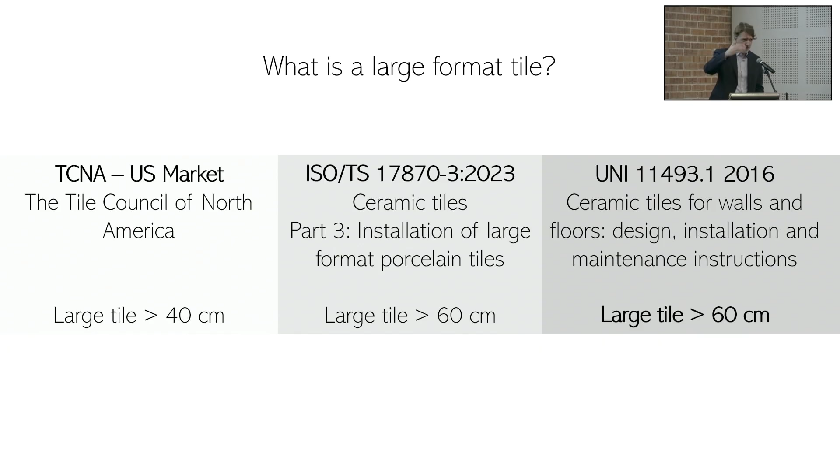You see, for example, in the United States, in Europe, in Italy, their local norms give advice to designers and, of course, to applicators on what is a large format tile. As you can see, in the United States they say more than 40 centimeters. In Italy, in Europe, basically we say higher than 60 centimeters. So this is the first step we do to analyze the situation. And of course, if you say over 60 centimeters, it can be 2 meters, 3 meters, even more in terms of dimension of the tile, because the tile producer can make large tiles in a thin, very thin thickness. This is a key point about fixing tiles and properly handling them.

The first thing I'll say is something very non-technical, a practical thing. People choose the large format tile and think about how to fix it, but sometimes they don't really consider the logistics, the practical application of this kind of material. When you receive a large format tile, you receive it on a pallet like this, so the maneuvering, the movement, the handling of a large format tile requires a specific environment. In my private little house, it would be difficult to obtain something like this. It seems a very underestimated thing, but it's true.

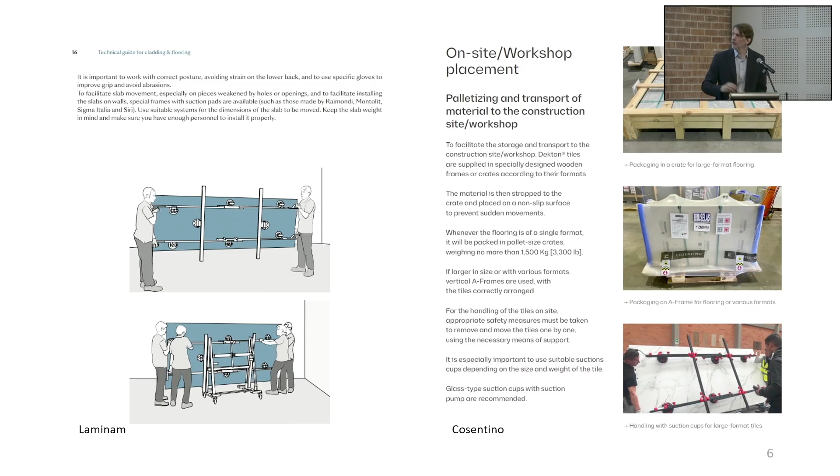All the tile producers, Laminam, Panaria, Atlas Concorde, apart from the adhesive system you have to use to fix tile, they put out recommendations on how to handle them. Do you know how much one tile costs, 3 meters by 1 meter 60? A lot. Since they are very thin, the movement of this kind of material is the first key point.

We need to use special tools, sucking pumps, bars and metal elements to move them without breaking. I see on YouTube and TikTok some video applications of this kind of material, and honestly it's not a reflection on the people doing the job, but the risk of breaking this tile, especially when they are 3, 5, 6 millimeters in such long dimensions, is very critical. So these are the right tools we can use for maneuvering the large format tile.

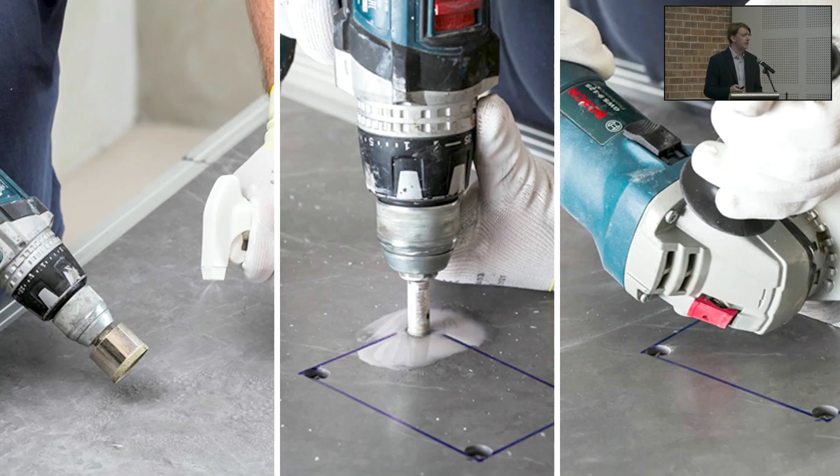Also when we have to cut them, we need special support, special tables and tools to provide a clean cut or edging of the material without defects, even providing special holes and elements into the tile itself. I say this because we experience many times in Italy that even before choosing the fixing system, before the adhesive or the substrate, the tile is already broken. And in this case there's nothing you can do. No epoxy resin, no elements can repair a defect given by wrong handling of the material. So I spent some time on this to make you aware.

At MAPEI, when we do training with our customers or even in collaboration with the tile producer, we adopt this kind of system to show the applicator exactly what the right maneuvering of this kind of material should be. But let's go into the point.

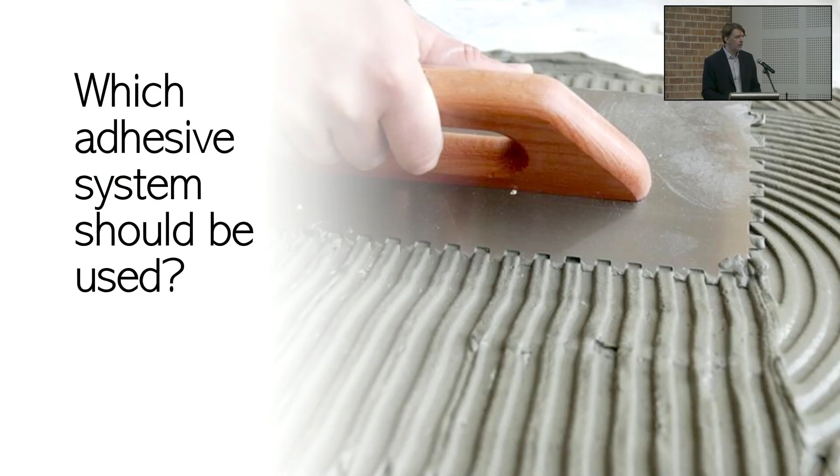What kind of adhesive, what kind of fixing system do I need to use for this kind of tile? The choice of fixing system depends on different factors: type of substrate, final destination, weather condition, type of tile, of course, and most of all the deformation and the backside of the tile. Let me spend a few words on this.

The type of substrate is quite clear. Do you think fixing tile onto plasterboard or onto screed is the same? Do you think fixing tile onto a waterproofing system or onto concrete is the same? It's not, it's very different. These kinds of substrates are different from one another. Do you think I can fix tile onto a metal surface?

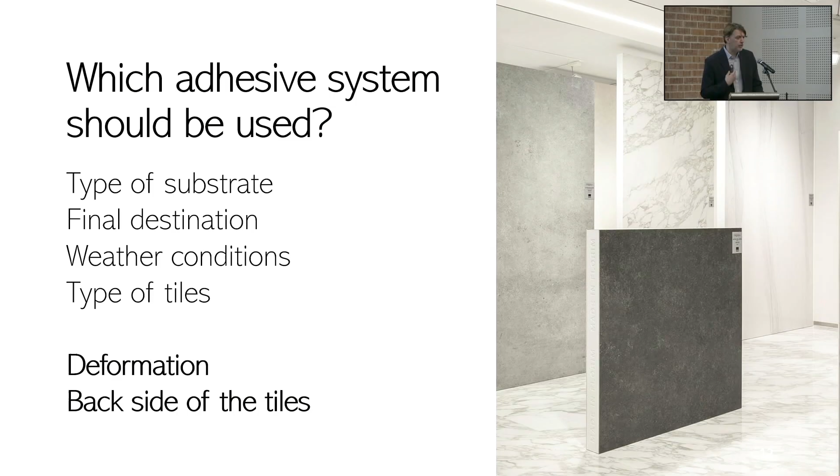So the choice of the adhesive depends on the type of substrate, and also depends on the final destination—airport, shopping mall, hospital, private house—and weather conditions. For example, temperature and humidity are kind of obvious things but should not be underestimated, and type of tile—in this case we have a large tile. But more important for us, much more important, as a producer, is the deformation and the back of the tiles.

Why? Because the deformation of the tile, especially gres tile, porcelain tile, is one of the most affecting problems when choosing the adhesive to do the job on site. If I consider the coefficient of deformation of gres tile, I see that its proper deformation is very, very thin. So if I ask myself, is this gres tile deformable or not deformable? The answer should basically be not deformable, because the coefficient of deformation of porcelain tile, compared to others, is very, very little, very thin.

Of course this is a very superficial consideration, because to know if the tile moves, I need not only the coefficient of deformation but also the size of the tile. Because the final deformation, delta L, is given by the temperature delta, the coefficient of deformation, but also the size of the tile.

In this case, even if the product itself is not very deformable, when I use a 240 centimeter length tile, I have a deformation of around 1 millimeter for this material. Is 1 millimeter a big deformation or not?

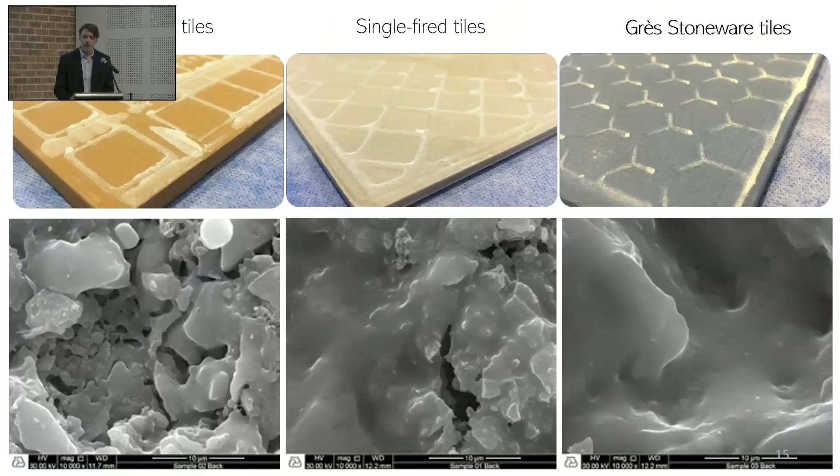The second point we need to consider to choose the proper fixing system is that tiles have changed a lot in the last 40, I would say 50, years. Many years ago, still today but especially many years ago, the back of the tile was very absorbent, single fired, double fired, very absorbent material on the back. Maybe very thick, but also absorbent. What does it mean? It means that the cement, or anyway the fixing system I adopt, will penetrate the back of the tile quite easily.

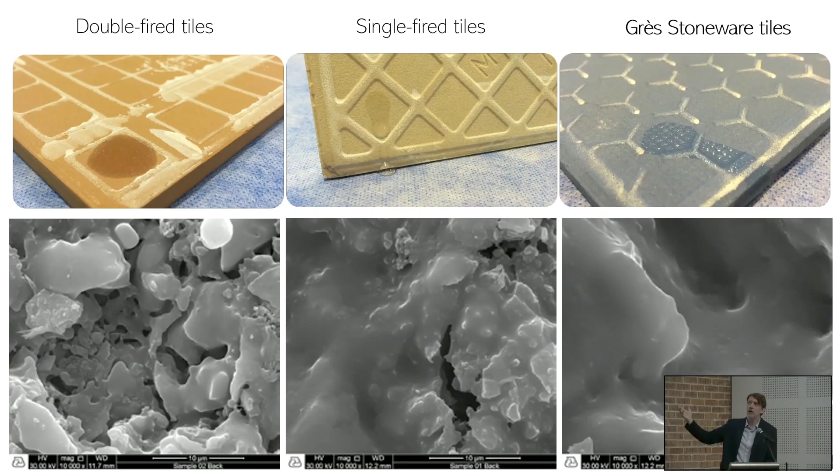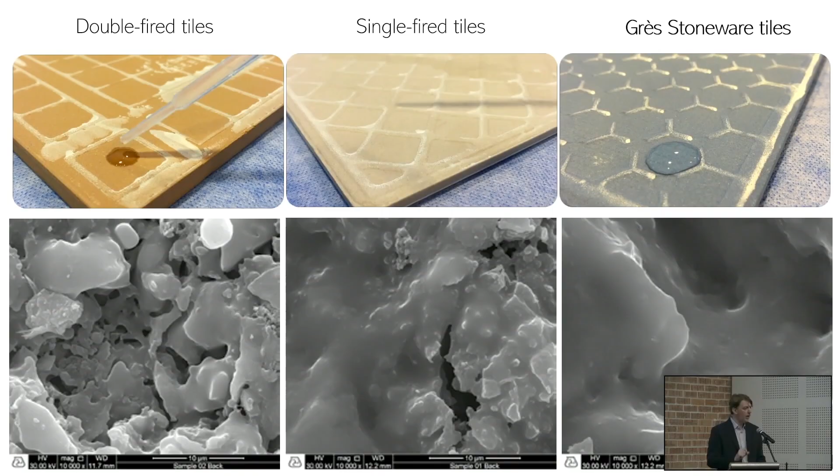So it doesn't require such a strong power of adhesion for this kind of material, because the porosity of the back is open enough to allow the cement to get in. But today, not anymore. Today we have porcelain tile. You see in microscope pictures how the voids under the tile have changed a lot. So in this case, the back of the modern tile is not absorbent. My question is: can I fix easily a material which is not absorbent? Not that easy. So in this case, I need to consider what kind of adhesive, or what performance is required from the adhesive, to be able to fix them.

And consider that we are not talking about the top of the tile. The final customer checks the top of the tile, the color, the shape, and everything. Me, I never consider the top of the tile. I don't care about that, I consider the back, the dimension, and the back.

So the traditional way of fixing tile, you remember this one, maybe it's still adopted somewhere, doesn't suit anymore with the modern tile. Because this kind of system, which was used for many years, has some very important limits when we fix tile. For example, you need a lot of water because this is a semi-wet system, you spread cement on the surface. The power of adhesion of the slurry bond coat made with cement is 3 to 4 times less than the pre-mixed adhesive. So this system, I'm not judging it, I'm just saying that for the modern tile, unfortunately, it is not safe. I can use this for thicker tile, I have marble for example, and I can fix 2, 3, 4 centimeters. The weight of the marble will keep it there.

In any case, we need to switch to adhesive. And when we switch to the adhesive, the premix adhesive, the question we put to ourselves is: okay, the tile is big, the back is not absorbent, what kind of material can I use to fix the tile?

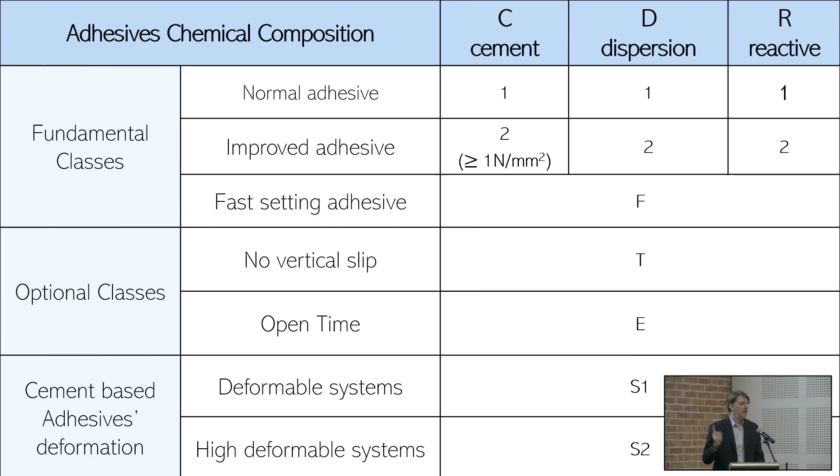The dispersion adhesive is just a ready-to-use product. You don't have to mix anything - you open, you apply, you close, and go to another job site. But it's a very specific product that requires a very absorbent substrate, so the market for this kind of material is a niche, in my opinion.

The reactive adhesive is the strongest adhesive you can find on the market because it's not cement, it's made of resin - epoxy resin, polyurethane resin. Epoxy or polyurethane resin can fix anything onto anything.

For example, you need to fix tile onto metal - I cannot use cement because cement doesn't fix on metal. I need to fix tile onto plastic, PVC - I cannot use cement because cement doesn't fix on plastic. Only reactive adhesive can do that. Just a very common example.

You have a stair made of metal. You want to cover it with whatever - marble, tiles, wood. Okay, you cannot use cement, you need to use the reactive.

You have an elevator. Into the elevator, you have the basement made of metal. Sometimes it happens - you can find how they fix the tile there. Not with cement, because cement is not fixing. So the reactive adhesive costs 3, 4, 5, 6 times more than cement, but can fix anything onto anything.

So the most common instead is the cement C adhesive, and it's divided into class 1 and class 2. Did you know that? Not all cement are the same. Adhesive class 1, C1, adhesive class 2, C2.

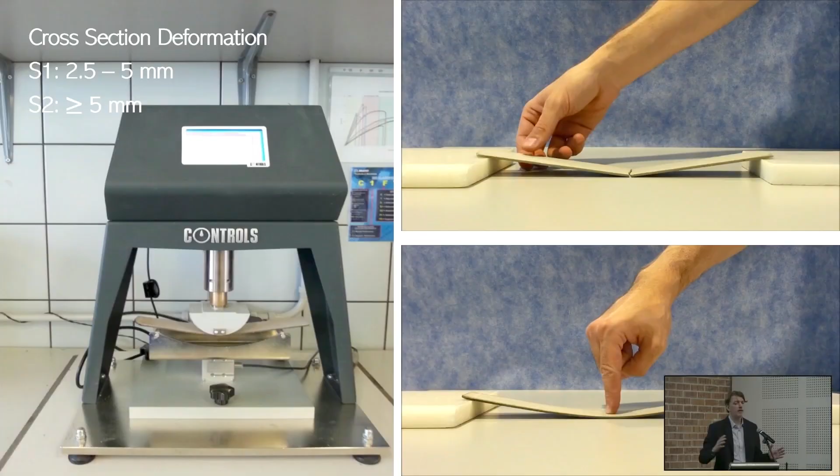But I want to focus on the deformation of the adhesive. Remember we said that the tiles, especially big tiles, can have a certain movement. So when I fix this kind of material, the deformation of a cement-based adhesive can be an interesting characteristic. Some adhesives are not deformable, as you see at the top.

Some others are deformable, and the international standard divides them into class S1 and S2. Class S1 is between 2.5 to 5 millimeter deformation, class S2 is over 5 millimeter. Don't worry, you don't have to remember all this. You're here just to know that they exist - there's a norm and it's doing something. Then we will help you remember everything.

So classes S1 and S2 become very important for deformation when we have to fix tile, for example, onto a deformable substrate. You fix tile into a swimming pool - the question I ask myself is, is the swimming pool a stable element or a deformable element? I have to fix tile on a skyscraper - is this structure deformable or not?

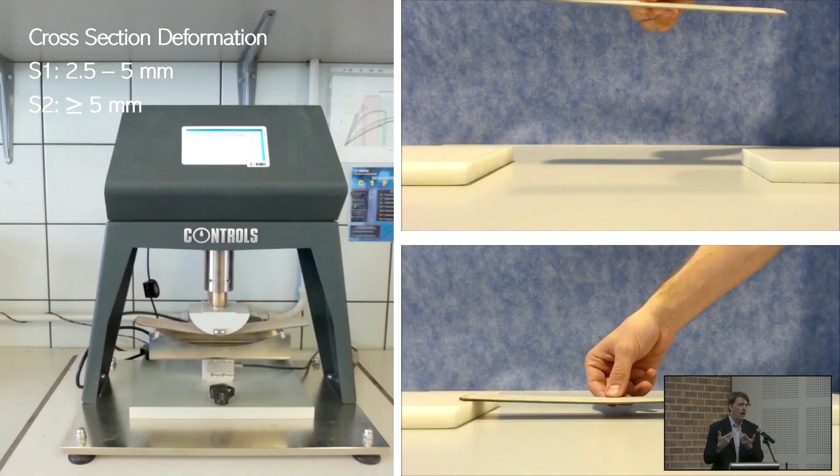I need to fix tile on plasterboard. I need to fix tile on tile. I need to fix tile onto a waterproofing system. I have to ask myself this question. Who is going to ask himself this question? Not the owner, but me, you, the technical guys, I think.

So every time I think there is deformation, I can stop and say - not necessarily a MAPEI product, but according to the international standard - I can use an S1 or S2 adhesive to provide the system more deformability, to reduce the modulus of elasticity of the whole stratigraphy. This is a way to be a little bit safer during application. So just to reconnect the international standard with the reality of the job site.

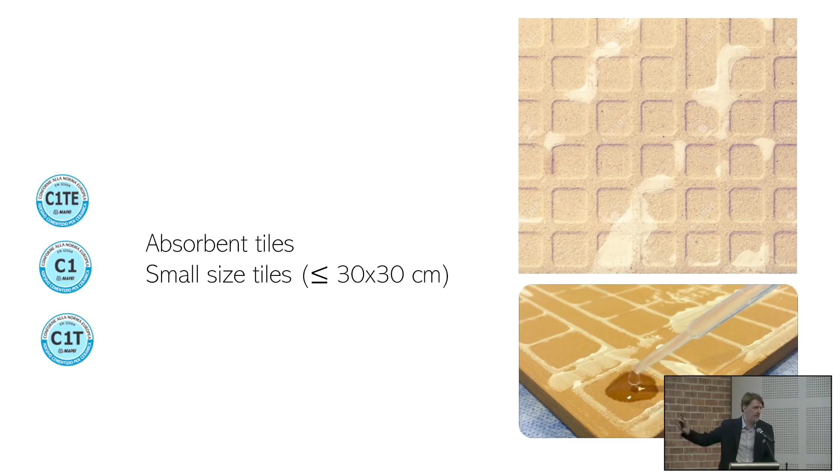The C1 adhesive - basic adhesive - is used in interior applications for very absorbent backside and small tiles. Think of my house, my bathroom, small tile, absorbent, okay. I don't want to say any adhesive is okay, but C1 adhesive for sure works there. If I instead buy a glass tile, not absorbent on the back, then I pass to C2 adhesive.

Because C2 means improved adhesion, and I need improved adhesion to fix onto non-absorbent material. And in case the tile size becomes even larger, then I move to S1 or S2 adhesive. Every country has more or less its own regulation, but we give this kind of indication: higher than 120, we go with S2 adhesive, maximum deformability. Higher than 60, we go with deformable adhesive.

So when you provide advice to our customer, we can say, no matter what brand you use, in this job site I need you to respect the standard for the adhesive for this kind of application. Otherwise we may have some problems in the final application.

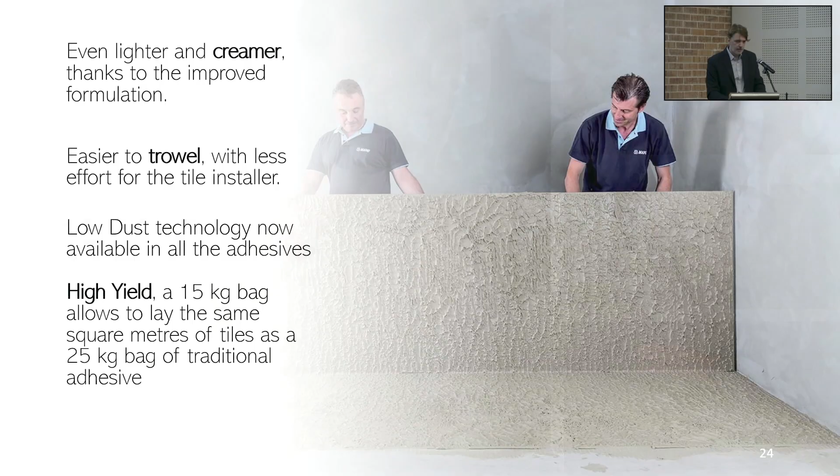Of course, just to finish this part, we need to consider the way we apply the adhesive. It's not enough to adopt the right system - we also need to fix tiles in a proper way, because the application of the adhesive can really affect the final result.

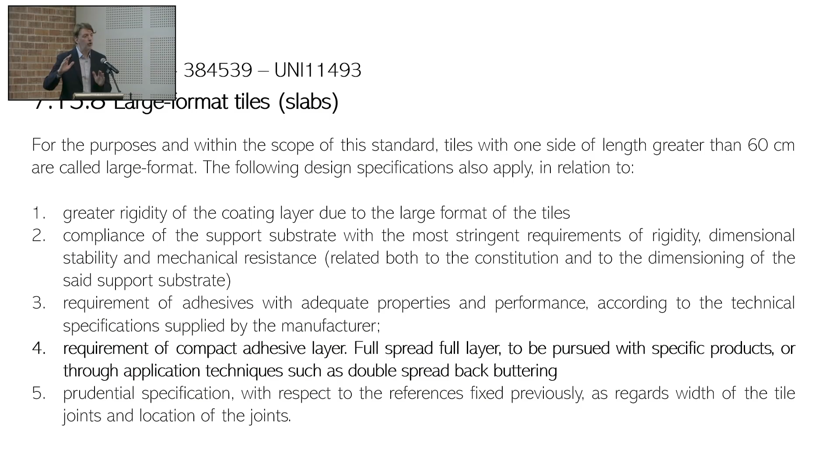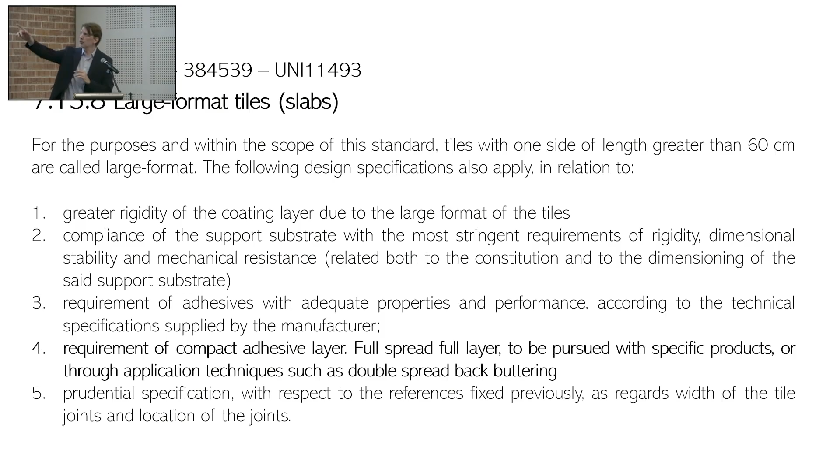In Italy, for example, we have some local norms. They say when you apply a tile with one side larger or equal to 60 centimeters, you need to take the tile, apply adhesive on the back, apply adhesive on the bottom or floor or wall, and fix them together, just to try to cover...

...95% of the back of the tile. It's not a law given by the government, it's not a mandatory norm - it's advice contained in the Italian local standard that we, along with the local Italian association of tile producers and adhesive producers, created together as our best recommendation.

Because if the tile is big, I don't want to have hollow spots - I want a consistent sound, not hollows or voids under the tile. So I need to apply the double buttering system of adhesive on the back and on the substrate.

So we can sell more adhesive, basically? No, it's not that - because the customers say this too. They ask, why do you want to sell more adhesive? Well, you know what - please, do whatever you want. If you don't want to adopt the system, don't adopt it. It's okay for me.

Remember that if you have voids under the tile, water will go into the voids - because water passes into the joint anyway, no matter what you do, it will pass into the joint and go under the tile. Water under the tile is a problem, because over time it will affect the adhesive and the adhesion.

Not here, but in other countries, when the water becomes ice, it will break the fixing of the seal. So it's not to sell more adhesive, it's also in the national standard. It's just the best advice we can give, basically for free.

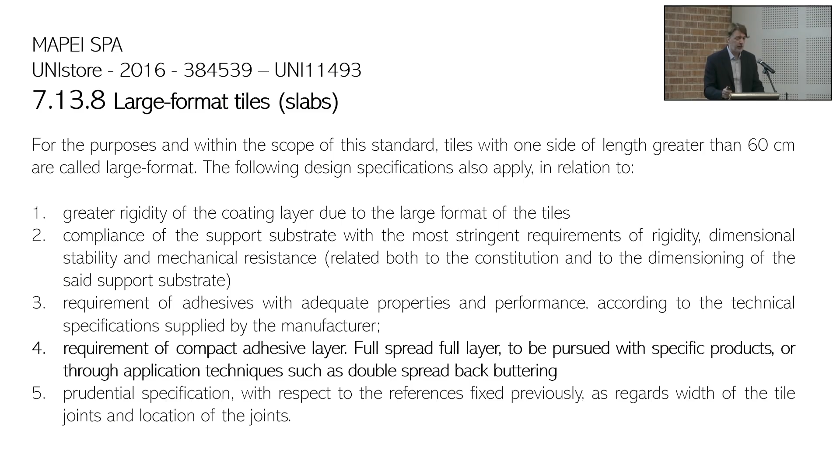This is the double application of the adhesive. You see it on the back of the tile and also on the substrate. There are some tips we give to the applicator. Honestly, this is something we discovered with their help, the help of the applicators. Sometimes you see that way to apply the adhesive, very artistic. You can put it on the brochure, on the video, it looks nice.

Sometimes I also try to do that, it brings you some happiness. But in this case, you see here the ribs, the lines of the adhesive on the back of the tile and on the floor, are in the same direction, according to the shorter size of the tile.

Because when you lay them down, if the lines of the adhesive cross each other, the air will be trapped under the tile. In this way instead, the percentage of water and air trapped under the tile is very minimal. And when I press the tile once I finish, the air will go out in the shortest direction possible.

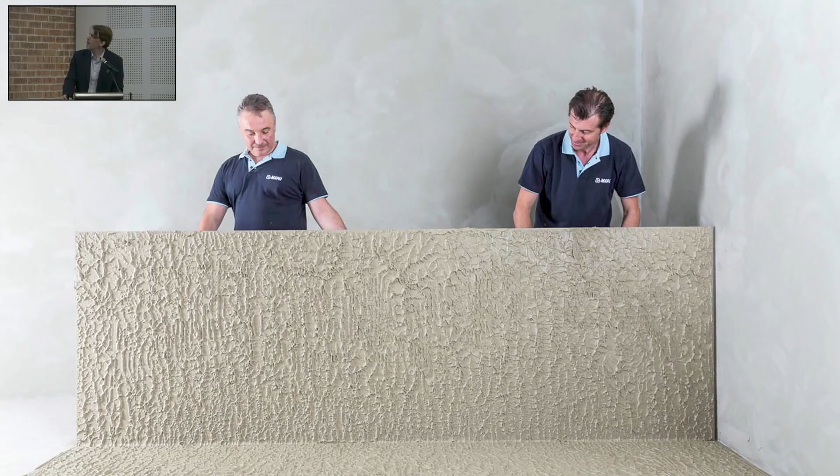These are just some advice that we provide, but we learn this also from the applicator. So the application of the adhesive is important, as is the right choice of the adhesive, to obtain no voids and full adhesion, which means all the adhesive is working.

Sometimes people do patching, fixing, have you ever seen that? Very, very dangerous. On the floor it's impossible for me, because if you patch the floor and something drops on it, it will break the tile. Apart from the fact that when you walk on the floor you hear that, it's also very dangerous on the wall. The point is that if you patch it, you have many voids under the tile, and many problems with those voids.

You propose an adhesive in class C2 with 10 kilograms per square centimeter of adhesion, but you only fix 30% of the tile. So what do you think will happen? There can be detaching at that point, because the adhesive is not working properly.

Okay, let's bring up the second point, which is quite linked to this one. Time is really running, so I'm going too fast, going too far. Can I slow down? I can slow down, but we need 2 hours.

The second point I promised you is a typical defect that we see on the job site, which is efflorescence. The efflorescence coming out from the tiling, not depending on the type of covering - can be marble, can be glass, can be bricks, can be whatever. Sometimes the white spotting comes out through the joints, the cracks, until the surface.

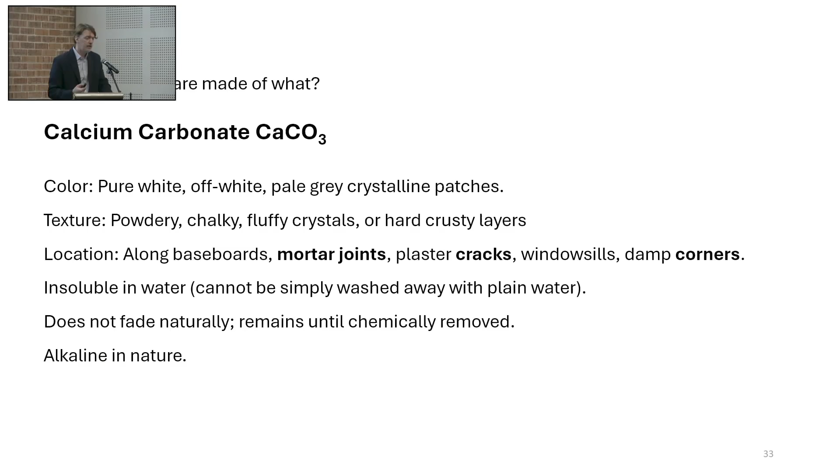You cannot solve it just by washing - I wash the surface and goodbye. So the first question we analyze in our study is: what is this white spot made of? Generally speaking, this white spot is made of calcium carbonate.

Calcium carbonate is a white compound, crusty, a little powdery, with a very high pH, that appears at the exit points of the flooring or wall - the joints, the cracking, the corners, the drainage, wherever there is water. It appears in this kind of situation, and cannot easily be cleaned with water, as I told you before.

But the second question is, if this is calcium carbonate, where is it coming from? You will be surprised to understand that the calcium carbonate comes from calcium hydroxide. And calcium hydroxide is naturally present in the substrate. Cement, during the hydration process, produces a certain level of calcium hydroxide. The cement they produce in the factory during production also produces a certain level of calcium hydroxide. So do we have a problem with cement?

No, we don't have a problem with cement. This is normal, very normal. The problem is the dampness, is the water.

Because if you have much more water than what is required by the cement compound, the water in excess will bring, by evaporating, the calcium hydroxide on the surface of the flooring or the wall. When it arrives on the surface, the water will evaporate and will meet CO2, will meet the air.

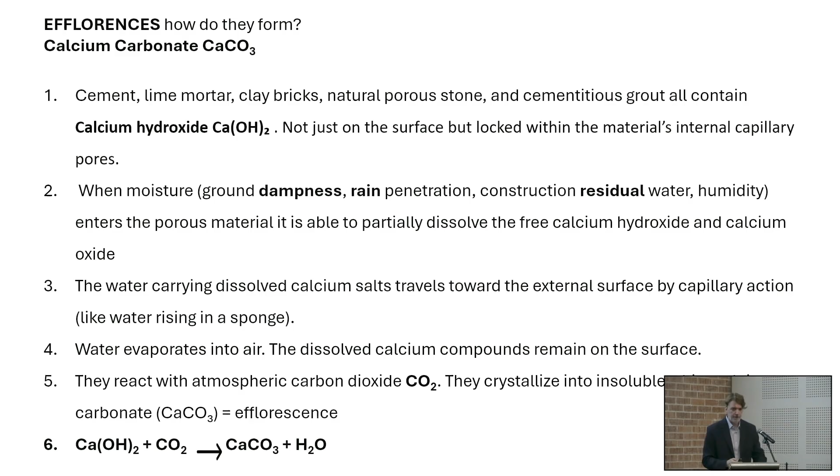So what we can do, if the white spots come from the binder, come from the water, come from the air - of course we cannot do anything with the air. We can try to work on the binder. The binder is the cement.

So we can try to modify it. MAPEI is trying to do that, to modify the binders, applying some aluminous product or ettringite product, fast setting product, but they are not so easily accepted on the market for price reasons and for application reasons.

I understand this. So basically we can work on the water: no leakage, no rising damp, no residual moisture, no crack on the surface where water can get in. This is the best project way we can do to avoid the formation of efflorescences. So step number one, let's stop the water from getting into the structure.

This is a simple application in a terrazzo, in a balcony. I want to stop the water. How can I stop it?

Somebody thinks, well, I can stop it here in the joint. Maybe I can apply a waterproofing material in the joint. Maybe I can use an epoxy system. Epoxy is watertight, so in this way water will not penetrate.

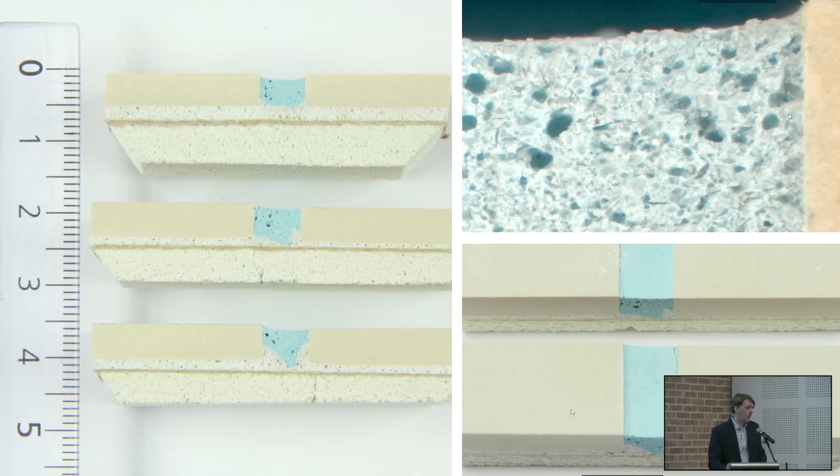Unfortunately this is not working, because we have analyzed many times in our lab the conjunction, the touch point between the grout and the tile. And any grout, even the epoxy grout, at the edge between the tile and the grout, there can be some little voids. So you cannot guarantee that the water is not passing through.

So let's set aside this point. On the floor, outdoor I mean, the water will always enter the joint, no matter what you do. You can reduce it, but the water will enter the joint. And this is not a problem, it's normal, because there are other ways to stop this kind of penetration, but not the joint, okay?

So what normally is the stratigraphy to stop the water? Normally the waterproofing system is based on the structure. This is concrete, and then we have the stratigraphy of the floor, the cement leveling, and then the tiling. This is the traditional way. You see, the waterproofing system is placed right on the structure.

So it means the concrete is protected, but when it is raining and the water gets into the joint, it will pass through the screed to the cement layer and will be stopped at the level of the waterproofing. So the cement over there will be wet, correct? Because the water can pass through. And when the temperature grows, the water will evaporate, and we go back to the problem we saw before. So we may have efflorescences on the surface of the tile.

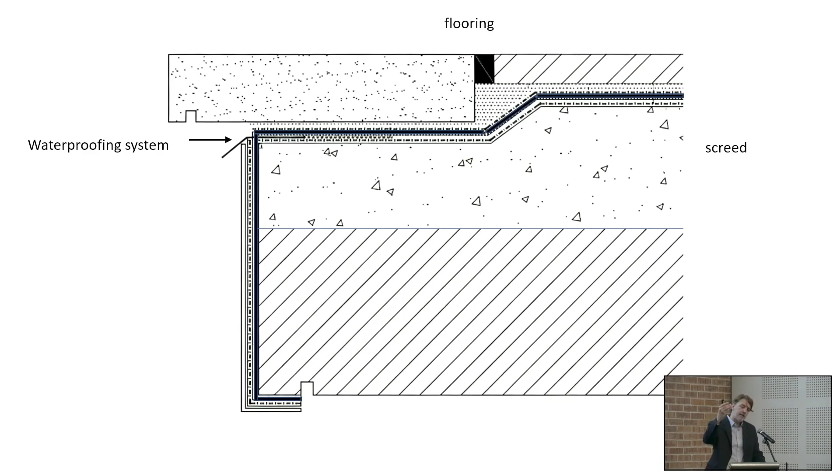In this case, when it is raining or when you wet the surface, the water will penetrate into the joints, but will immediately be stopped by the waterproofing system. And in this case, all the stratigraphy below will be completely dry, with no rising damp, no excess water inside, and so no efflorescences.

If we complete the system, the scheme, we see - I put some names inside. We have the waterproofing system at that point, and we have some other important elements. We have the slope - we need to do the slope, of course. We need to add, to close the joint between different materials like tiles and marble, with the deformable.

Here you see we have the slope, the waterproofing, and here because this is marble and this is tile. Marble moves differently than the tile, so here I need to place a waterproofing element, like a deformable silicone, because this one is moving and this one is moving, and I need to connect the different movements of the material with the waterproofing and the slope. In this system, a very basic conception, but in this way we can evacuate the excess of water and avoid penetration of water into the substrate.

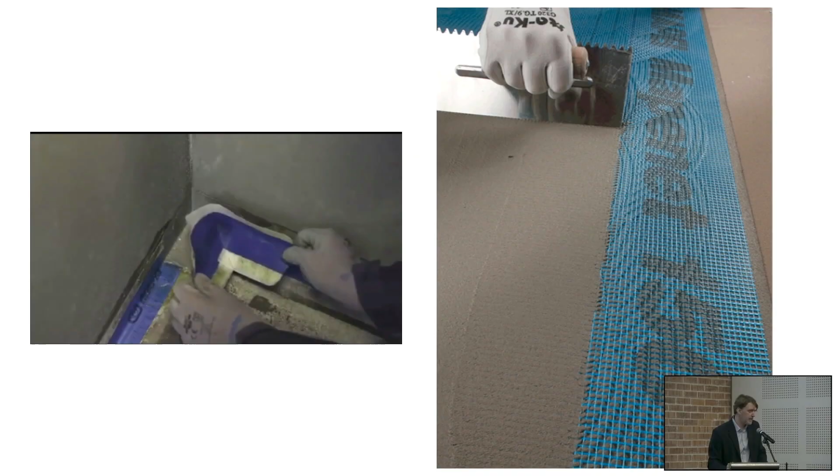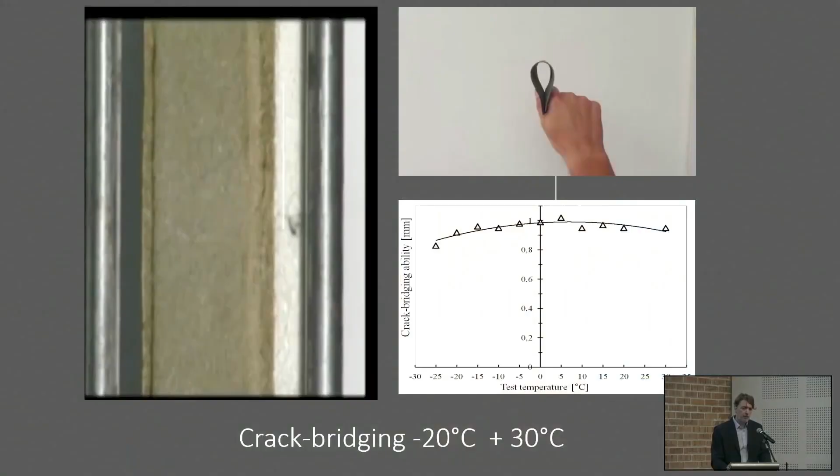The product we use, there are different types of product to do this job. We have some cement-based material, like this one you see in the video. This is a two-component cement elastic material that can be applied on the surface of screed, concrete, whatever it is. It is very deformable, so it can follow the movement of the substrate, and eventually in case of a crack in the substrate, the material can really follow without cracking.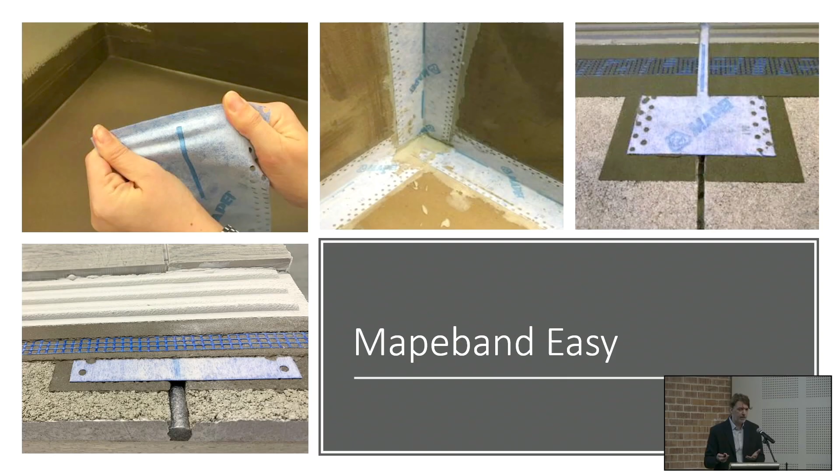Consider that for the waterproofing system, I'm showing you this as an example, but the world of waterproofing systems is huge. We can find many kinds of waterproofing systems, but not all of them can reach the standard required for this kind of material. For example, if you see the technical data sheet of our product, or the technical documentation we provide for free on our website to our customers, you have the guarantee about the performance of this material.

In this case, this material that I showed you before, the waterproofing cement-based element, is classified according to a European standard, but this is recognized from an international point of view, and it confirms its performance in terms of elasticity.

For example, you see the different elements composing the classification. We have minus 20 degrees performance in terms of application and elasticity - it's not your case maybe, I know here you don't reach this kind of temperature, but it's a guarantee for the customer that in any environmental condition the product can satisfy the requirements given by the international or European standard. It can also be resistant to contact with chlorinated water, eventually close to the sea or lake, or water contaminated by chlorinated elements.

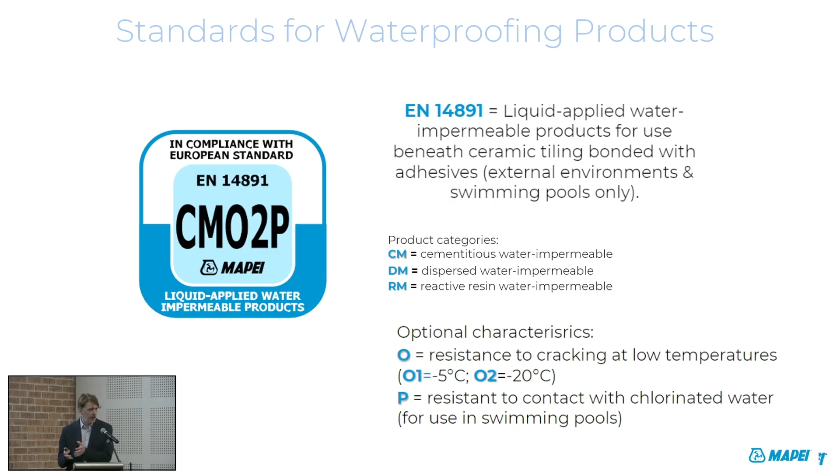So this kind of classification can make the difference between a certified, qualified product and a homemade waterproofing system. The performances are also defined in our technical data sheet according to the specification of the norms. We see crack bridging ability under standard conditions, because we have to test it in different conditions. We propose clearly the value of deformation the material has, and also the initial tensile adhesion, how much it can fix on the substrate.

This is just to tell you that in your position, when you have to give advice or give a specification about a waterproofing system, you are not alone. You have our staff, local staff can help you, but on your own you can also refer to this kind of standard to guarantee to your customer and to your project that the waterproofing is doing what it's supposed to do.

Okay, so this is a possible stratigraphy we can have. I'm going to close - this is a possible stratigraphy we have. We have the waterproofing system, we have the screed. Of course we can also adopt other types of material than the classical one to fix the tiles or prepare the substrate. So the waterproofing system is blocking the water, but maybe you can also change the system, adopting a different binder for the substrate which has a humidity, residual moisture lower than 4% after 3 days.

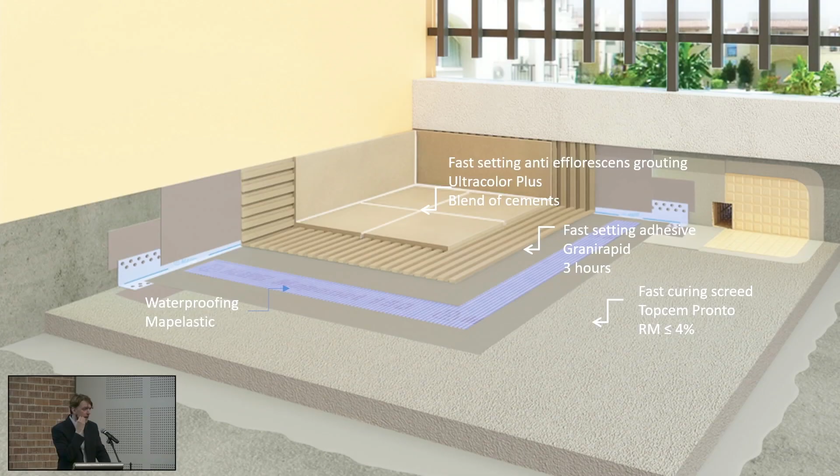But if you want to do a good job, you need to wait 7 days for each centimeter. If you adopt a special binder for the screed, you just need to wait 3, 2, or 4 days if it's winter, because the special binder sets and reduces the humidity lower than 4%, which is what's required for fixing tiles, in just a few days. These are just tips for when you have a job site. Sometimes we use this kind of material when they are in a hurry - they need to finish a hospital or a shopping mall and cannot wait 30 days to finish the job. So in 1 week, they need to close. So special binder for the substrate, for the tile, and for the grouting, and in a few days, sometimes in 1 night, it's done.

Okay, I finished with the substrate, the last 10 minutes. I have 10 minutes? Do I have 10 minutes?

Okay, the substrate - unfortunately, this part I always leave for last because everybody wants to listen about the adhesive and the norms. But I'll tell you a secret: all the things we said before are super good to do, but if you make a mistake here, nothing will work. So the substrate must be flat. There are many international norms and standards that provide you the quality of the flatness of the substrate. You know why the international standards talk about the flatness of the substrate? Because people use the adhesive to flatten the surface.

And now my colleague will not be very happy if I say this: the adhesive cannot really do this job. I know they do it, I know on the job site they do it. But the adhesive is made of cement, sand, and additive. The sand in the cement is very, very thin. You remember the concrete? Concrete has rocks inside, stones, because concrete needs to do thickness. So there is a relation between the size of the aggregates and the thickness they can achieve. The adhesive has very fine sand - if you push the adhesive to a significant thickness, it will break because it's not made for that.

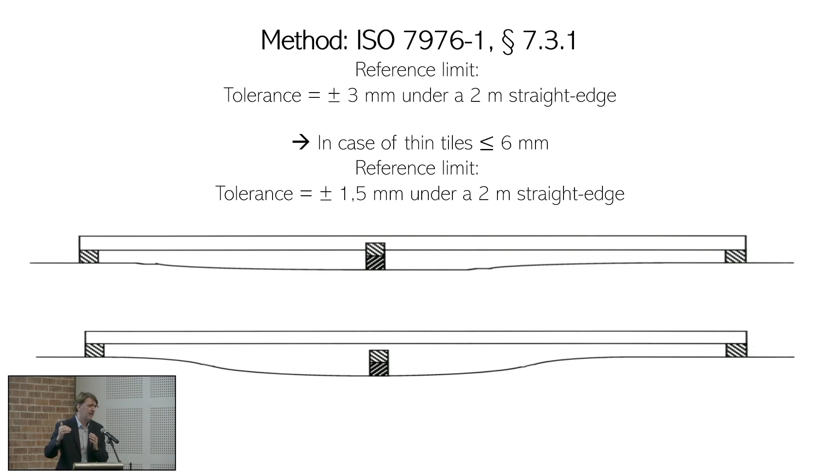This is a big problem that we need to solve before fixing tile. If we have cracks, we need to close the cracks, maybe with an epoxy system.

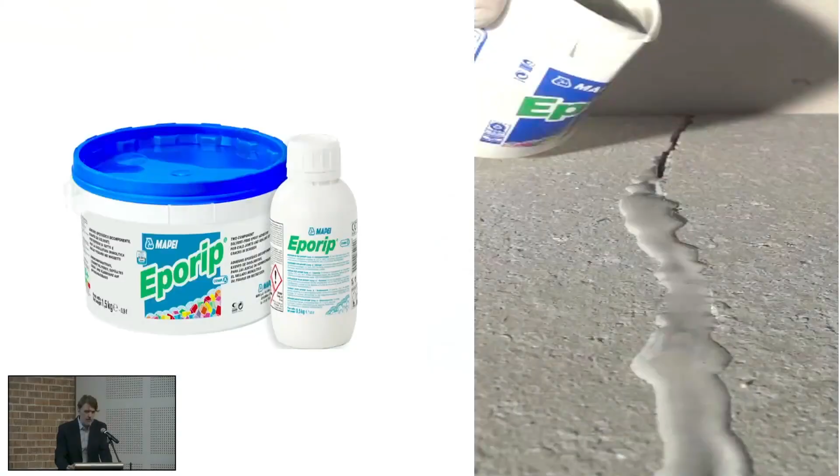Yeah, this makes me lose my 5 minutes. I know that.

Okay, we need to fill the crack with the epoxy system because the crack has some kind of natural joint, let's say - we cannot fill the crack with cement. Normally people say, okay, I have some adhesive or some cement, I can use that. Why not? Because this is cement - if there is a crack, it means the cement is not able to bear the deformation of the crack. I need something stronger than cement. In fact, I can use this - oh, there's a picture of a product, I'm sorry, I forgot the name. Anyway, this is an epoxy system, epoxy resin.

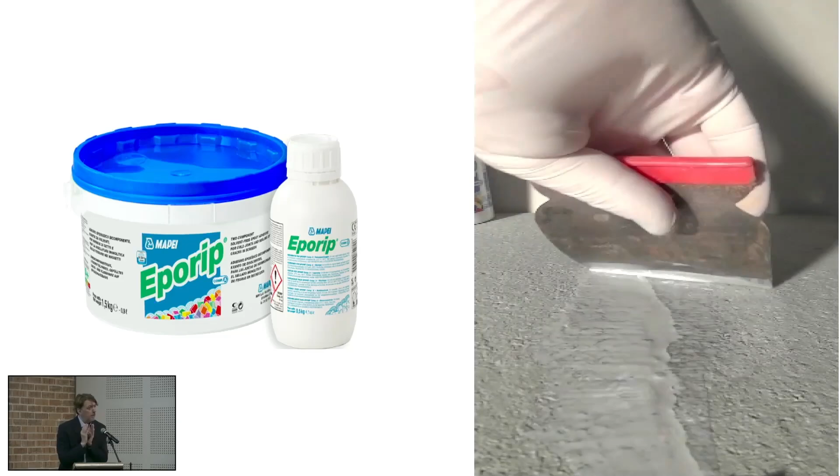You can pour into the crack and close it in a monolithic way. But the point is not what product I use to fill the crack. The point is why I have cracks. If I don't understand why I have cracks, I close the crack, and then another day there will be another one over there. So the question I put to myself and to you is: why do I have a crack?

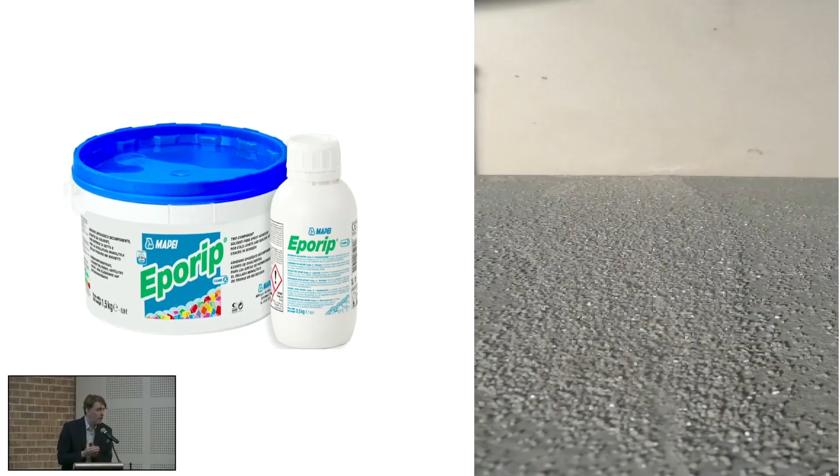Maybe you have cracks because you don't do the joints. Cement needs expansion joints, every 9 square meters, 25 square meters, 12 square meters, depending on the application you have to do. But we have to do that. We have to cut it 1/3 of the thickness of the screed or substrate, and then do the joint. Otherwise, we have a crack like this.

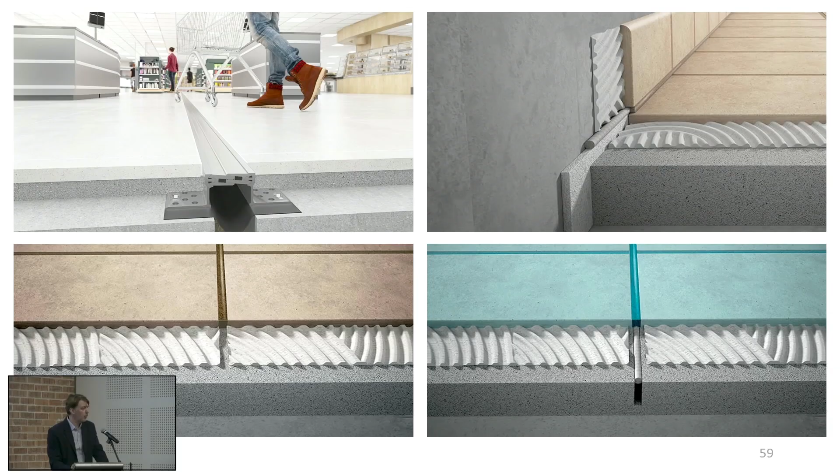And there are many types of joints in the structure. We don't have time to see them one by one, but there are different types of joints that we need to consider. You need to consider it, and we are here to help you, of course, if you call us before the job.

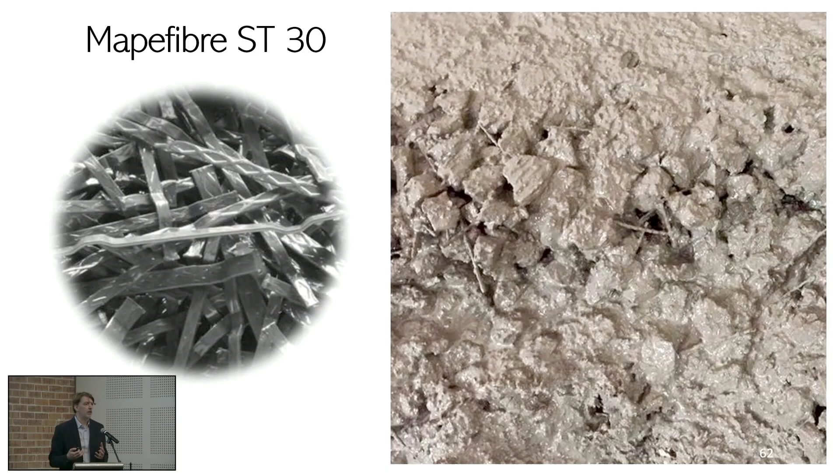To reduce the formation of cracks, we can also add into the screed some fibers, metallic or polyester fiber, something that is going to reduce the shrinkage or bear the shrinkage of the concrete. Or we can adopt some additives. There are special additives, at a very low dosage, 1% of the weight of the cement, that can reduce the shrinkage of the cement Portland compounds.

I'll finish with this one, and then I really finish, because this kind of element is quite new in the market, at least. In Italy, we introduced it 3-4 years ago, but maybe in the United States it's much more common than in other countries.

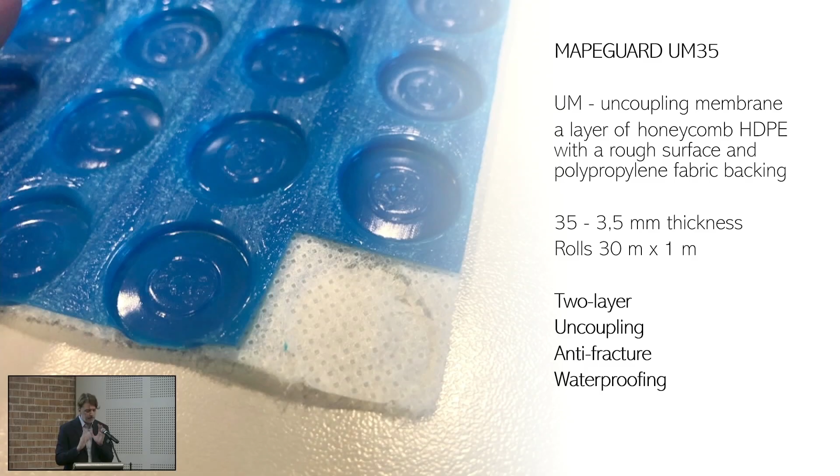Anyway, when we talk of large format tiles, and when we talk of preparation of the substrate, we need to pay attention to a little detail: if I have a joint on the floor, and I want to fix large format tiles—imagine you buy a 3 meter tile and want to fix it down, but there is a joint. As you saw in the picture before, I cannot go over the joint, otherwise the tile will be broken. So I need to cut the tile. But, of course, if you buy a large tile, you don't want to cut it.

So what is the solution? The joint is there, I need to respect it. What can I do? The tile is here, I pay 300 euros per square meter for this tile. Now I cut it? Never.

So one solution is to adopt the anti-fracture membrane. We have the joint, or even maybe some cracks, but we don't need to respect it, because the anti-fracture membrane will cover everything, and I do the joint where I want, according to the geometry and design of my new tile or flooring. So it's a quite common solution that can be adopted in case of presence of joints, heating screed, etc., stuff like this.

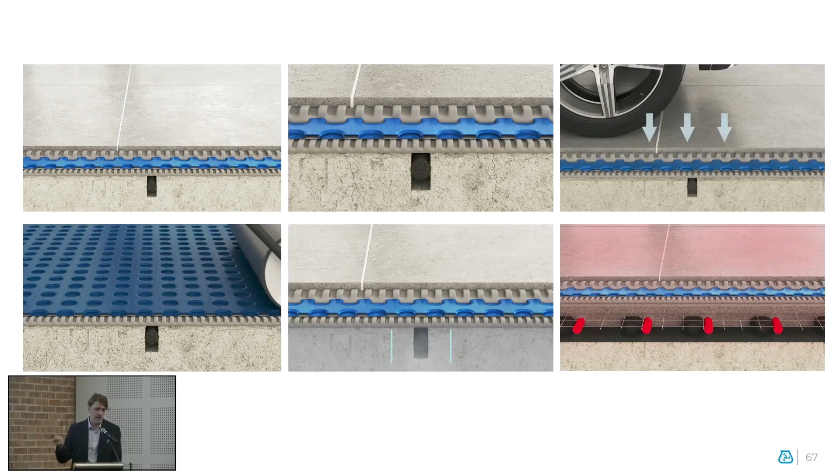Just an idea I give to you in case you want to fix a large format tile. The application is very easy and can be used in different kinds of environmental conditions. If we put it all together, we can have a very nice and successful application even in not easy conditions.

Do you think this is deformable? Yes. Do you think it's not absorbent? Not absorbent. Is the tile big? The tile is big. So if I sit at my desk for a moment and write down all the circumstances of this job site, I can refer to the international standard and to my partner in this job—can be MAPEI, can be whatever—and find the best technical solution so I don't go back again every year doing the job.

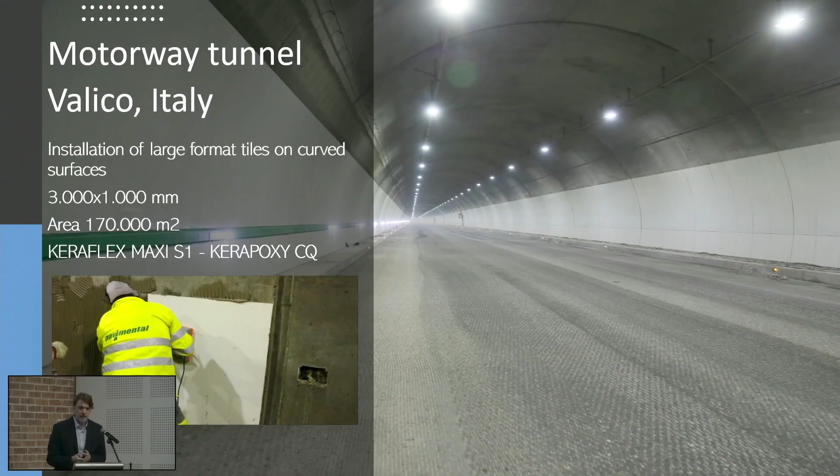I'm sorry I rushed in the last part because I feel the minutes here. So thank you very much. It's been very nice. If you have any questions, it's a pleasure for me to answer you. Thank you very much.

All right, thank you very much. I think a lot of information—especially even though we are practicing more than 15 years, for example—we still have a few other things that we can learn from the other projects.

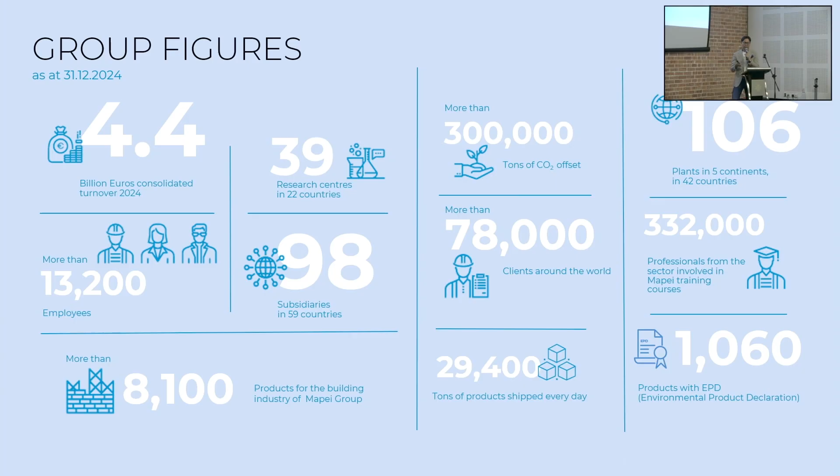In terms of the MAPEI Group, in 2024 our turnover was actually 4.4 billion euros. We have more than 106 plants across 5 continents in over 42 countries, and we also have 8,100 products—that's actually a lot.

In terms of the context of Malaysia, MAPEI Malaysia has our own Nilai plant, located in Nilai, Negeri Sembilan, and it's fully owned. It was built in 2013, with full production starting in 2015, and last year we celebrated our 35th anniversary.

In this plant itself, most of the cementitious and liquid products are produced. Only very special products, like roll form membranes or some special epoxy materials and resin products, we are still importing directly from Italy. Otherwise, we would not be competitive enough locally.

In this plant, besides production and warehouse, we also have the product development lab, the QC lab, and of course the technical service and training room. I'd like to invite you to visit our plant in Nilai for insightful training and demos of the materials—you can actually see the materials in this Nilai plant.

Currently, we are also building our Johor plant, in Senai, which is actually 2.5 times bigger in capacity compared to our Nilai plant in Malaysia. It's estimated to be completed in Q4 of 2026.

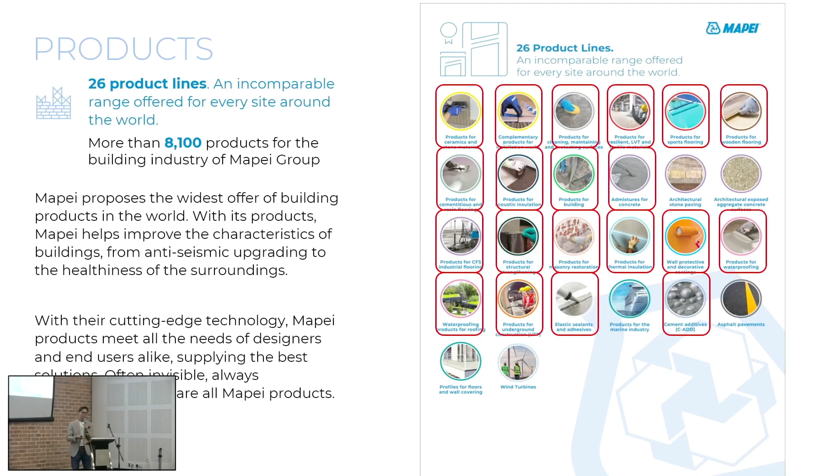I don't need to dwell on that, but I think most importantly, the message of today is that we are one of the corporate companies focused on sustainability. So whenever you see us, we carry this zero line of products, and we're talking about reaching full CO2 offset.

This is actually in line with what our government is preaching about ESG compliance, especially for the main boards of listed companies. So we do have the solutions for that.

I would like to play you some videos of this.

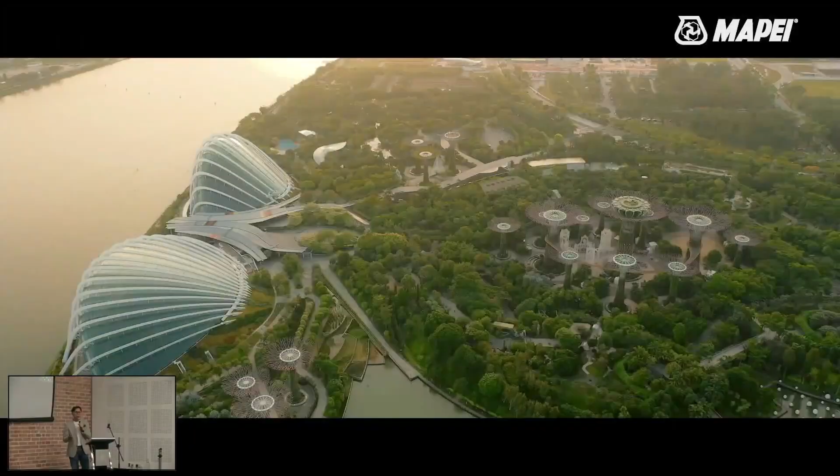Sustainability means being committed every day to building a present designed to have a future, a better future with zero impact. Sustainability means making informed choices that respect the environment and the health of those who live it. It's only by choosing quality products that future generations will be able to live what I designed today. Thanks to these products, I can carry out more durable works, so I can also make my contribution, and I even work better. Respecting the environment means taking care of it as if it were something of ours, because it is ours, it's everybody's. And this is exactly what people do when choosing zero products by MAPEI. Thanks to our research, we have optimized their formulas and their impact on the planet. We are also committed to offsetting all CO2 emissions produced during their entire life cycle. Choosing zero products by MAPEI means giving your real support to reforestation projects and transitioning towards a low-carbon economy. For my projects, I want zero products by MAPEI. Every day, I use zero products by MAPEI. For my home, I want zero products by MAPEI. Let's build a sustainable future together. Everything's okay with MAPEI.

So that is actually the video. We started this effort at our HQ since 2013, and after 13 years, this is actually our presence in zero line products around the world.

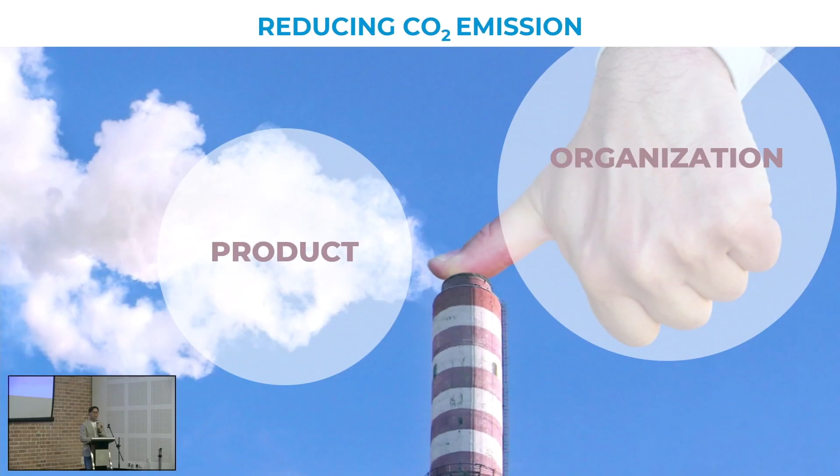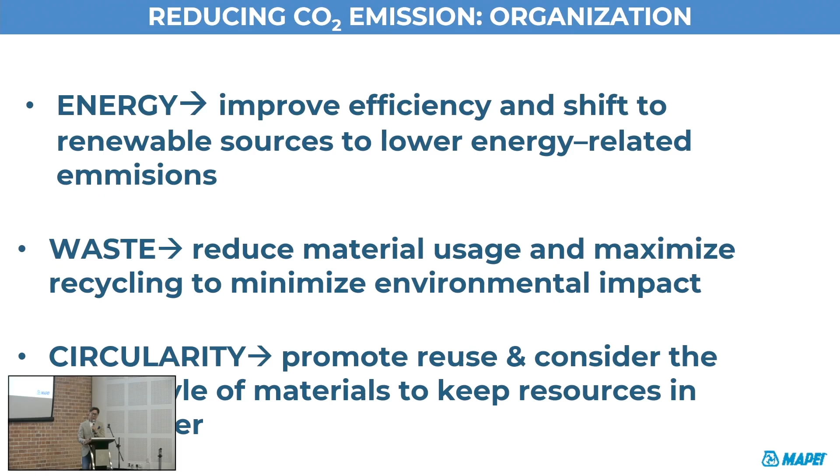First, we reduce CO2 emissions at the organization level by focusing on improved efficiencies and shifting to renewable sources to lower energy-related emissions. Secondly, we focus on reducing material usage and maximizing recycling to minimize environmental impact. The third is circularity, to promote reuse and consider the full life cycle of materials to keep resources in use longer.

We walk the talk, and in 2024 we actually installed solar panels in our plant. This happened in 2024 at our Nilai plant.

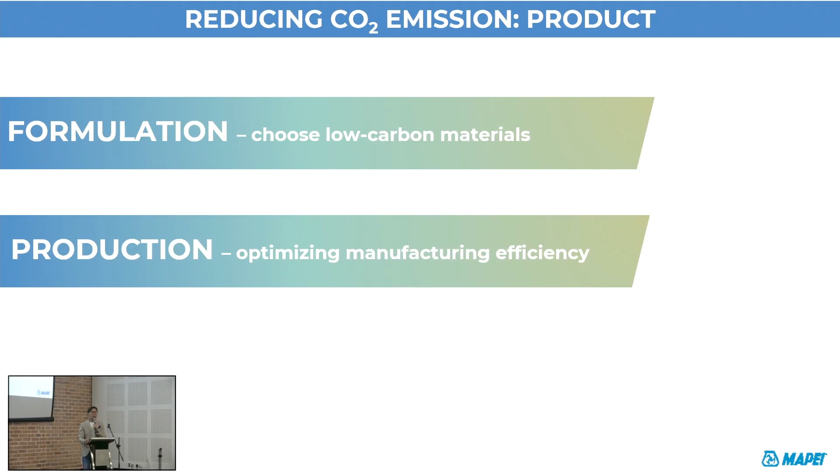In terms of product level, what do we do with formulations? We choose low carbon materials. On production itself, we optimize manufacturing efficiency. Number three would be on the supply chain, by reducing transport and logistic impact.

So we talk about all this, and there are things we focus on with the products, which is the EPD certification - Environmental Product Declaration.

How is this EPD developed? It all starts with the life cycle assessment, which is a massive measurement of the environmental impacts of the products along its life cycle. Then we carry this out with software, and it is verified by a third party during this process. Lastly, they issue us the EPD certification, in accordance with ISO standard 14025. We are proud to show you, I think there's more than that.

In Malaysia currently we have more than 4. Just to show you, the first would be the Mapelastic, which is our waterproofing. The rest are the tile adhesive, and the last one would be our tile grouts. So whenever you see the product name carry '0', that is the one already in the zero line products.

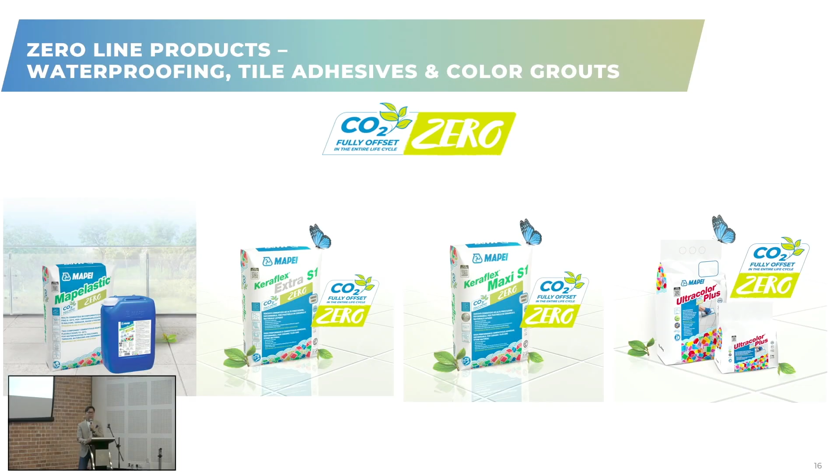In this, you can also download it from the website with the EPD reports available. Basically to highlight in each report, they have unique codes, the EPD registration number, which is unique for every product. So you cannot generalize for all the products. And it does have a validity of 5 years for each product, just to take note of that.

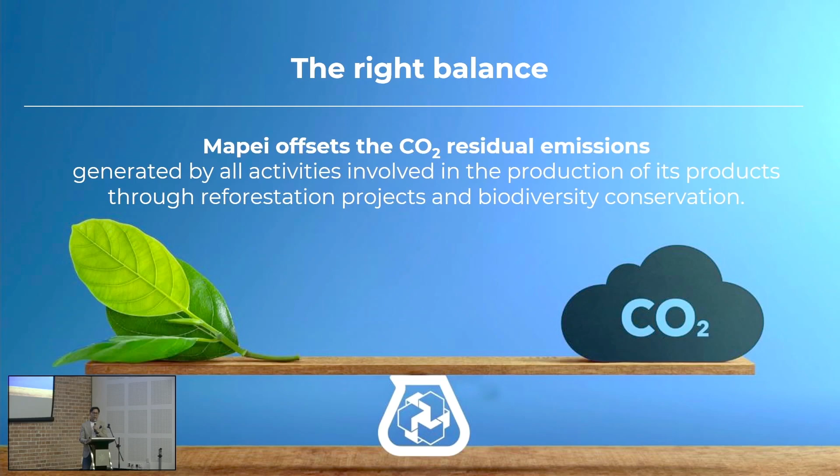At MAPEI, we offset the residual CO2 emissions generated by all activities involved in production of its products through reforestation projects and biodiversity conservation. That was highlighted in the video earlier. Just to give you an idea of how we actually do this carbon credit process.

For example, take our product called Ultracolor Plus, our tile grout. By assessing the annual production in tonnage, we multiply by the kgs of CO2 per kg of finished product. That actually equals the tons of CO2 that we need to purchase for the offset.

For example, the CO2 for 100 square meters laid with our Keraflex Maxi S1 would give you roughly 163 kg of CO2. And for 100 square meters grouted with our Ultracolor Plus, it gives you 10 to 15 kg of CO2. So the installation system itself will roughly give you 180 kg of CO2.

That actually makes up the annual uptake of 2 trees. If you're using a complete system, including the tiles, that will actually save the planet 1,800 kgs of CO2, exactly as 20 trees would do in a year.

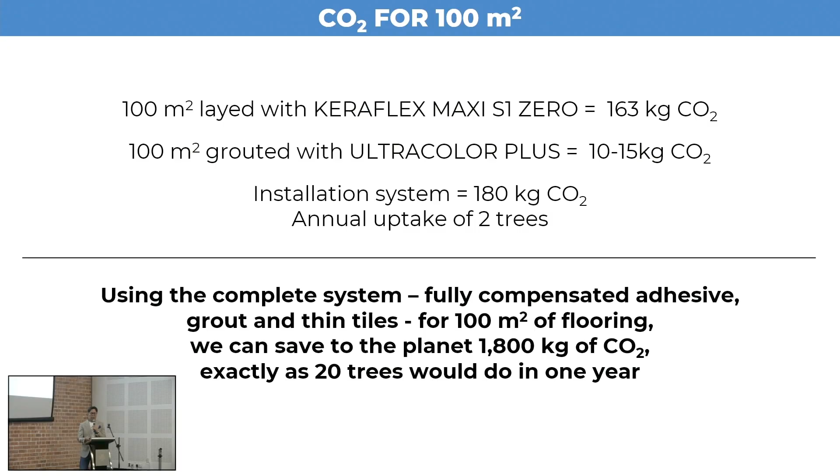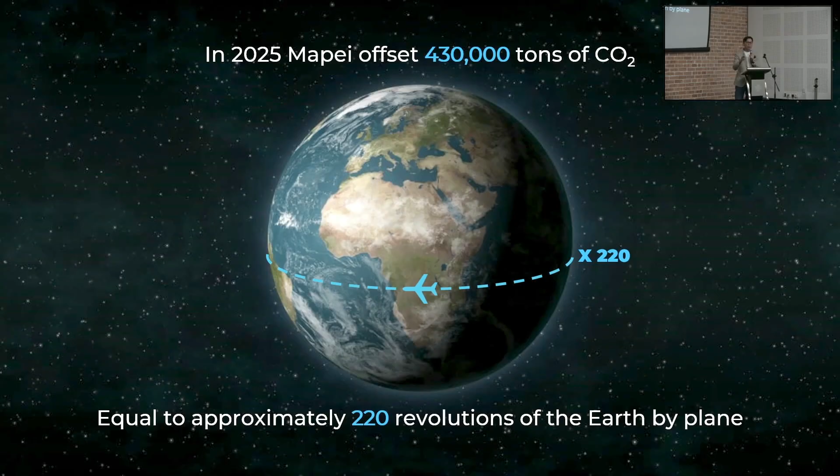In 2025, MAPEI offset 430,000 tons of CO2. That's actually equal to approximately 220 round trips traveled by plane.

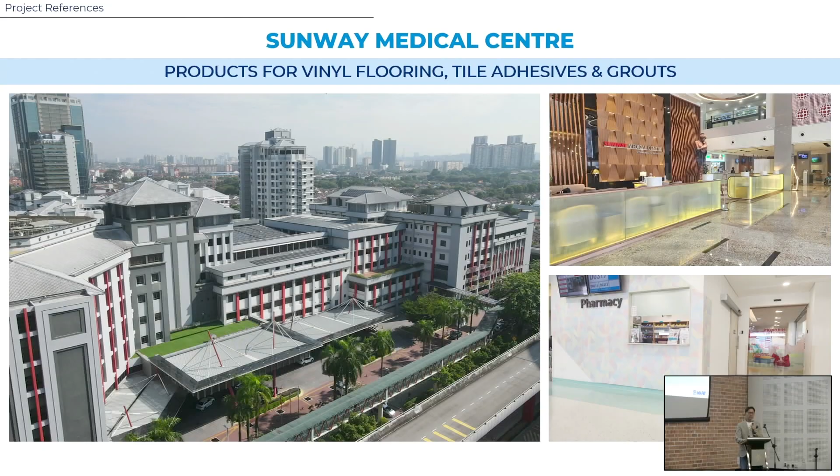We have medical lines - we have Sunway Medical Centre for the products of vinyl flooring and also tile adhesive and grouts. Of course we also have the Maya Bay residences at Gamuda Cove Townships, where the products involved are IBS.

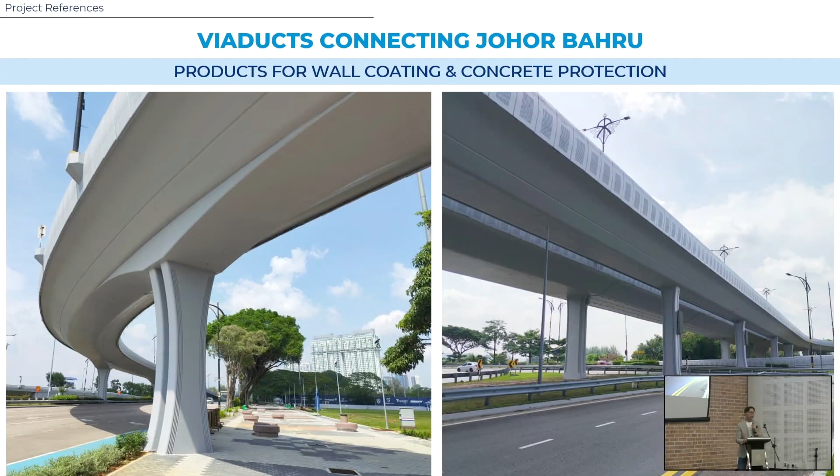So this is on the wall coatings and also concrete protections. If you drive along the way to JB, you will see a lot of upgrading works because of the Visit Johor initiative. They are upgrading all these viaducts and pillars that are protected with the coating, and you can see they are using MAPEI.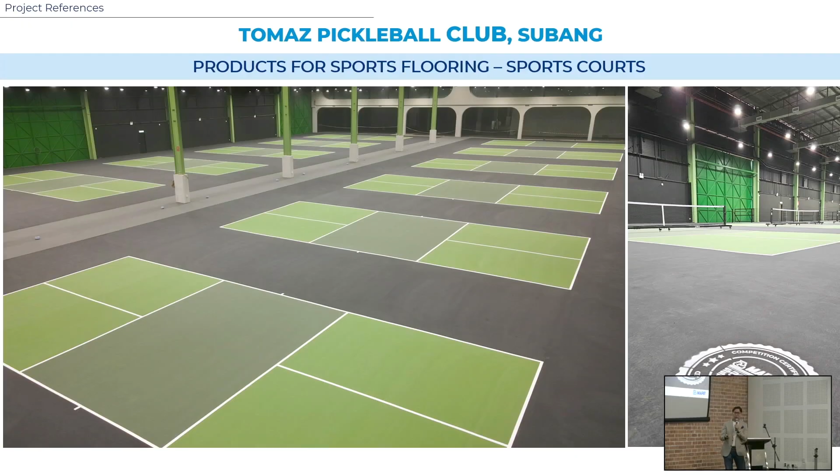Yeah, yes, Mr. Marco and Mr. Yong. Please. Okay, any questions from the floor? I think can we bring the microphone? We have a quick one, a very quick Q&A.

Okay, I have one question. If budget is an issue to the client, what is the element that they should never compromise, especially on the tiling works? You're talking about our support to them? Yes.

I mean, they are really limited in budget, for example. But first of all, I have to say that in MAPEI's conception, one of the key points is quality. So even when the budget is not sustainable, let's say, for the job site, we are lucky - MAPEI is a lucky company because we have a very huge range of materials. So it means the first proposal I give you is not the most expensive, it's the best one I can give you from the technical point of view.

If this is not matching the requirement in the job site, we can just skip slightly to a more acceptable commercial point of view solution. Anyway, we are always in the safe part of things. So even the lowest, the cheapest product we can provide you is anyway a little bit higher than the normal quality standard you find on the market.

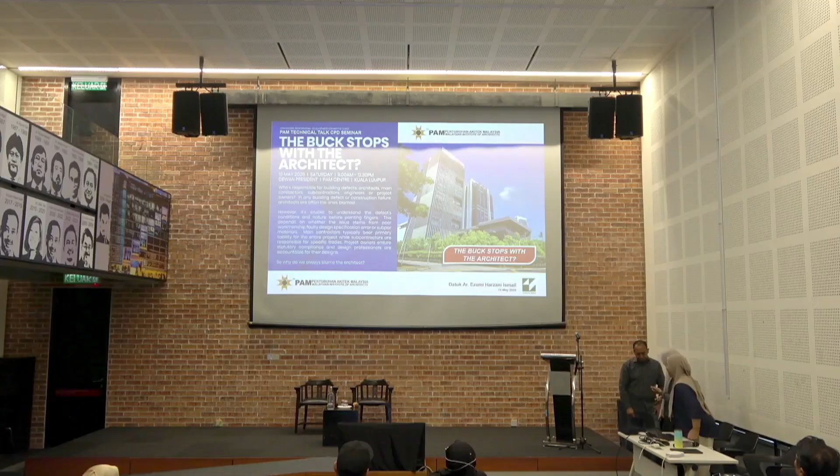Assalamualaikum and very good morning to everyone.

Okay, I have not been standing here for quite some time. Getting older and older, it's very difficult for me to step out to this stage. Okay, I was approached by PAM to give a talk, and I don't really have a topic that I want to talk about.

So then, looking through my WhatsApp messages, I found a discussion from before about the buck stops with the architects. The discussion was about who is to be blamed in the failure of construction, or defects and renovation after construction. So I think maybe this is an opportunity for me to share the real story behind the article, The Buck Stops with the Architect.

So who is responsible for the endless renovation? In 2022, in Kuala Lumpur, there were a lot of renovation works. I'm not talking about big projects - this is small projects, many of them at that time. Terrace houses, semi-D, bungalows, car porch extension, extension of the kitchen. So it was about small works renovation.

But DBKL still requires the applicants or the owner to get an architect to do the submission to get approval for the renovation. So for a small project, the architect doesn't really pay much attention to it. Sometimes the drawing was done by a draft person and gets the architect to sign, or is registered with the draftsman who prepares the drawing and does the submission.

And then the owner takes their own sweet time to do the renovation. Months after months, waiting for next salary to come, then doing a little bit of renovation. So after many months, after years, still haven't completed. And the architect also does not attend to the site because there is no proper schedule - they are living there, doing the renovation in the place they stay.

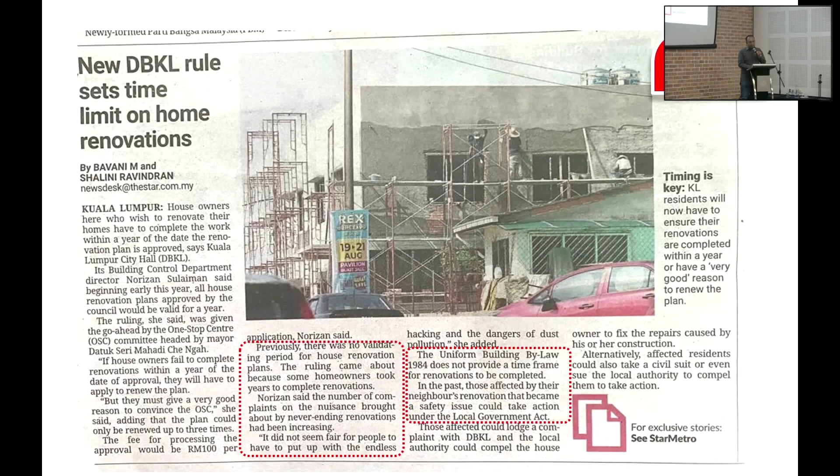So after this was published, the reporter contacted PAM to get the view from PAM, and also contacted some council members of PAM. So what happened? Past President Saifuddin Ahmad was the one who responded to the reporter, saying that the architect for the renovation work, because the architect is the submitting person, is responsible to monitor the works. So this is how the reporter actually picked up the line, but stopped at 'the architects', saying PAM past president.

So what happened after that? On social media there was a lot of discussion, and also in the WhatsApp group, a lot of discussion saying that statement is not correct, because the project was already completed with CCC, and renovation is not under the responsibility of the architect. That is correct as well.

Both are correct. But when the owner wants to do renovation, the owner needs to submit a plan for the renovation work. So for renovation work, it's not necessarily the original architect who submits the plan - the submitting person can be another architect for the renovation work. So what the past president was actually referring to is the submitting person for the renovation work, not the original architect.

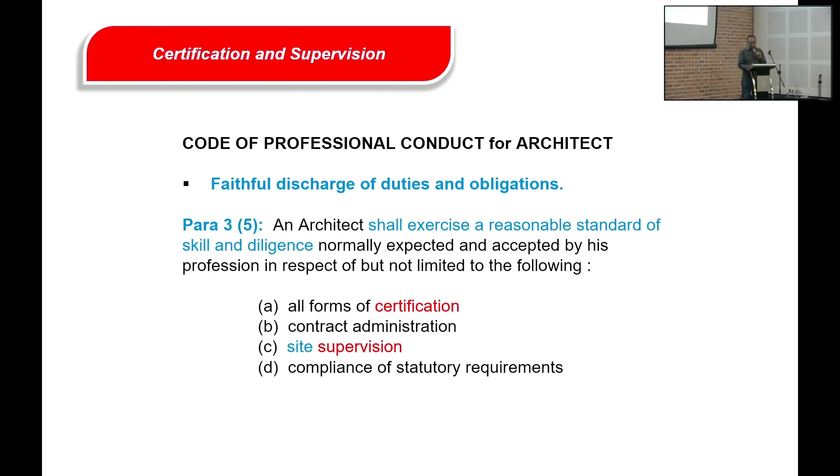When the architect or the submitting person submits the application in Form A to the local authority, that submitting person already certifies that he will take the responsibility and supervise the work. This is where the reasonable skill and duty of care came into the obligation of the architects.

Under the architect's rule, condition of engagement rule 29, condition of engagement 1, scope of services, and periodic inspection - those are the two main things you have to do, no matter how small the projects are. And then duty of care, Code of Professional Conduct, Rule 28, faithful discharge of duties and obligation.

This is Form A. It's very important for architects to understand what Form A is. Form A is not just a mere application form to get your plan approved, although that is what your client always sees it as. The client always sees it as Form A being the application to get the plan approved.

But what is very important here is the declaration. Under the Code of Conduct, there is the certification, any form of certification: I certify that the details in the plan, namely the project title, the location, are in accordance with the requirements of Uniform Building Bylaws 1984, and I accept full responsibility accordingly. That's why the buck stops with the architect, because the architect is the one who said I accept full responsibility, not the contractor and not the owner.

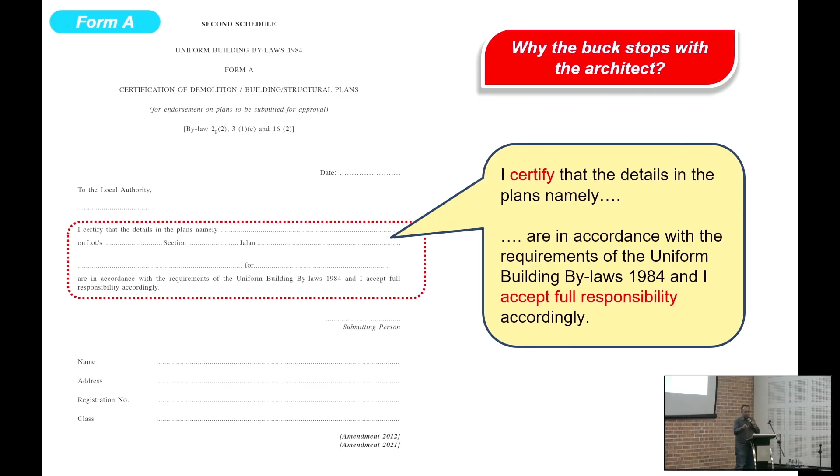Because of this declaration - and what is in Form B? Form B again is a notification for commencement of work, a very basic form. Originally it's just one form that you notify the authority that I'm going to commence the work in 4 days. If nothing happens, there's no objection, I will proceed with the work. And you must proceed - you cannot say you're going to carry out the work in 4 days but keep it 4 months later. You can't do that.

In that declaration, if it's declared that it's going to commence the work in 4 days, that has to be done in 4 days. This is again another declaration. So in the form of notification: I give notice that after the expiration of 4 days from the date of receipt of this notice, I intend to commence or resume the building operation, in case of suspension of work before, or for new work, I intend to commence.

So who commences the work? Who is doing the work? It's again the architect, not the contractor. This Form B notification is again the architect, SPSP, who makes the declaration to say I'm the one who's going to do the work, I'm the one who's going to commence the operation of the buildings, the operation of the construction. That is again why the buck stops with the architects.

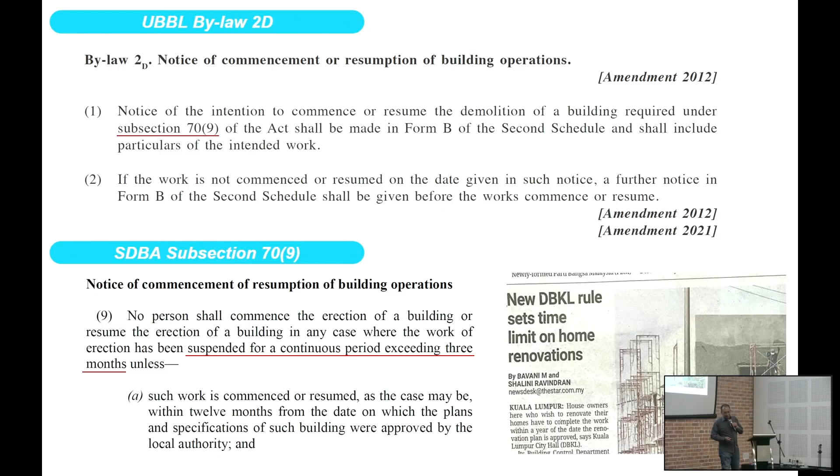So, notify the suspension of construction works to the local authority, so that they know the work has been stopped, and then they will come for inspection.

Finally, after they continue the work and everything's completed, as usual, after the inspection, if it involves the utilities, everything applies. But for small renovation work that does not involve the utility providers, then you can issue the CCC in Form F, because you don't need the local authority inspection for small renovation work. For G12, it is not required for authority inspection.

But this is again the final declaration: I hereby issue the certificate of completion and compliance for the building, the name of the building, the project title, upon being satisfied that it has been completed in accordance with the approved plan. And I have supervised the erection and completion of the buildings, and to the best of my knowledge and belief that such work is in accordance with the Act, Uniform Building Bylaw, and approved plan. I hereby certify that the building is safe and fit for occupation.

So this is a very important declaration that you supervise. No matter how small the work, when you declare this, you are responsible for the construction.

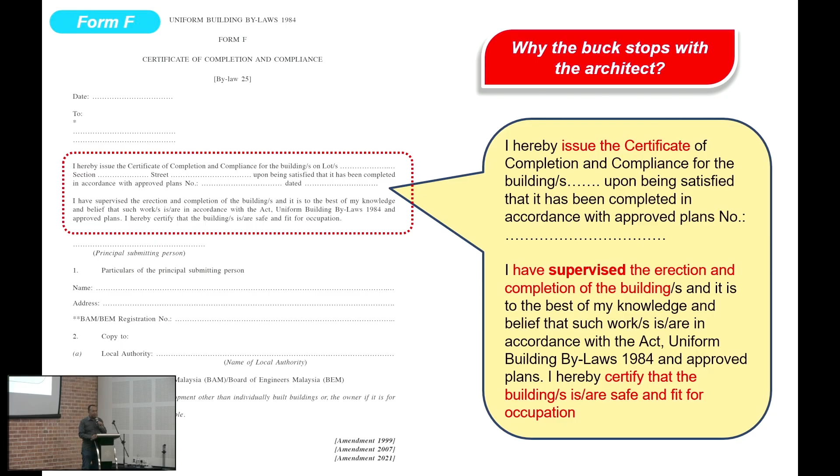So out of all the discussion about delaying completion of the renovation work causing a disturbance, and then who is responsible for that, just a few days after that, from 22nd of August to 9th September 2022, DBKL Mayor Datuk Sri Mahadi Che Ngah at that time made an announcement that minor renovations no longer require certified permits. So it means that for minor renovation, you don't need to submit the plans because you don't need the certified permit.

This is even more dangerous to architects because you certify the CCC upon completion, then deposit it with the local authority. After that, the owner renovates here and there, and the local authority has no record. This still happens recently - they extended the flat roof of the porch and put another story on top. The flat roof collapsed onto the neighbor's car and unit.

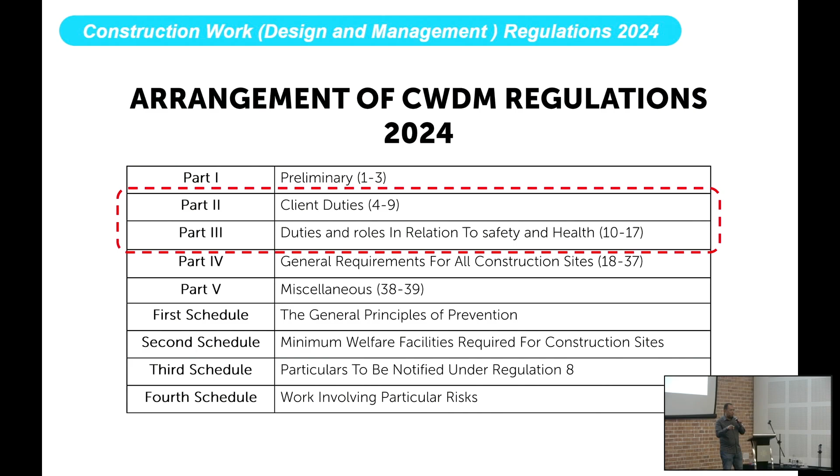But if you look at the positive side, this is where actually you are protected, because they put Part 2 client duties first before other people. And why is Part 2 important? You see 4.1, client duties in relation to project management.

The first one, A, allocation of sufficient time, fund, and other resources. In the earlier talk, there was a question about what if the client does not have budget for the waterproofing system. That is the responsibility of the client - allocation of sufficient fund. If you do not have sufficient fund, do the smaller one, or do not do it yet.

But you should not compromise by saying okay lah, I'll do it for you, if you know the waterproofing is going to fail. We need to hold to this - it is the client's responsibility to pay for the site supervisor, the architect's fee, and good material. That's why I say in concept and principle, the implementation of CWDM is very good because it puts the responsibility on the client.

Before this, it was always the designer, the architect, who took responsibility for material selection and method of construction. But now, due to lacking fund or time, like what Marco mentioned, they want the tiling work completed early. It's supposed to set and cure within a certain period, 7 days for every centimeter of thickness, but the client says I want it done by tomorrow.

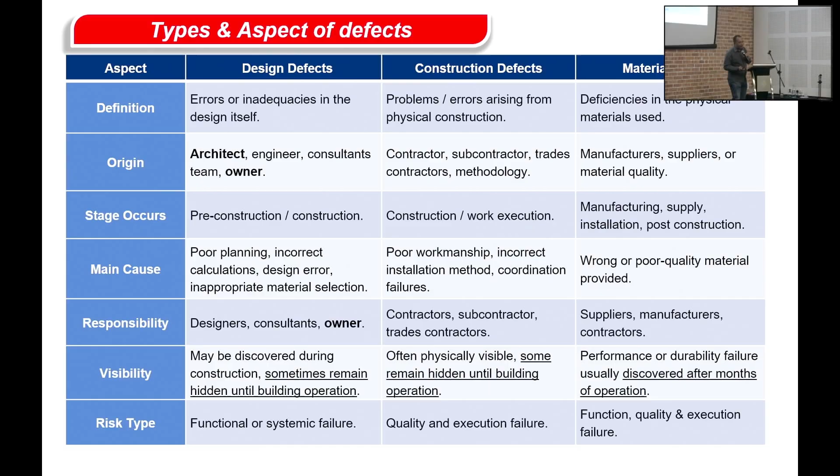Okay, so that's all I want to share today. If there is any question, I'm ready to take a question, whatever I can answer.

Oh, okay, thank you.

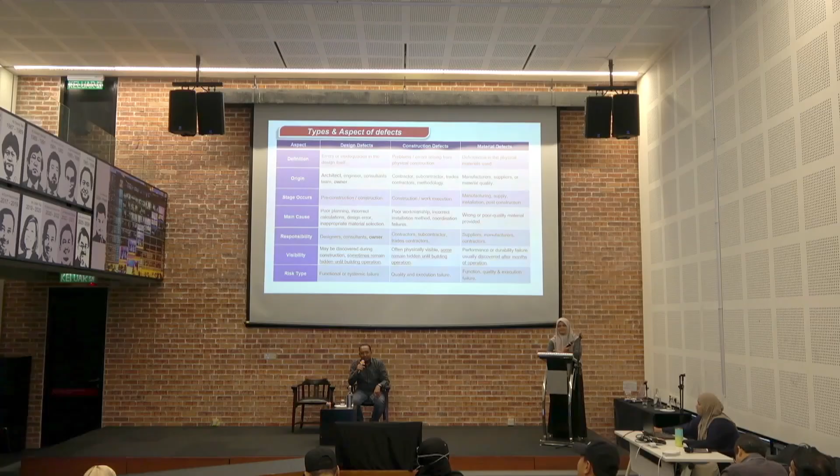One is about the UBBL. The UBBL is actually not UBBL because of our land law, where the states have their own say and local authorities have their own say. Local authorities can change, you have seen it, we have seen it in Highland Towers, where the court says the local authorities are not responsible and therefore the designers become liable.

Then Mahadi comes up in 2022 making that statement that you can do renovations without any submissions or whatever. But neither PAM nor anybody took the case up against him to ask who is going to be liable. In the earlier case, the local authorities were not liable. That's one about UBBL.

Perhaps you want to say something. The other thing is about... Can I respond first before I forget?

Historical questioning. The Highland Tower case is, of course, a landmark case, very interesting. At first, I think the decision was that the authority, MPAJ, was also responsible, but after the appeal, I think it was dismissed. So it was jointly liable: the designer, who actually is not the architect but a building draftsman, the engineer, the developer, and the contractor.

So they share the liability for the Highland Tower case. But referring to the statement by the past DBKL mayor that they give exemption for minor renovation, they have the right to do so, the right to give exemption. So they say okay, for small renovation, I use my power, this is exempted, you can do renovation, but you take the responsibility for that as the owner.